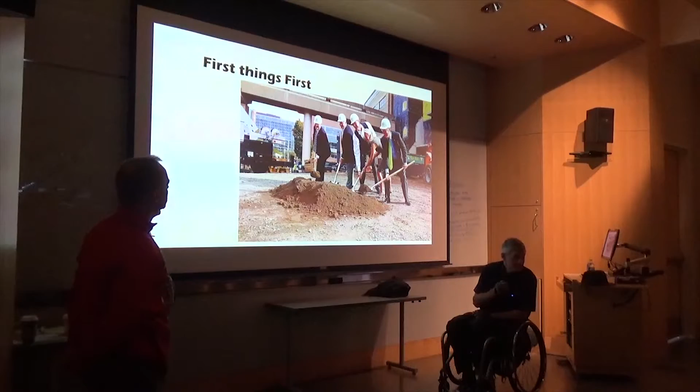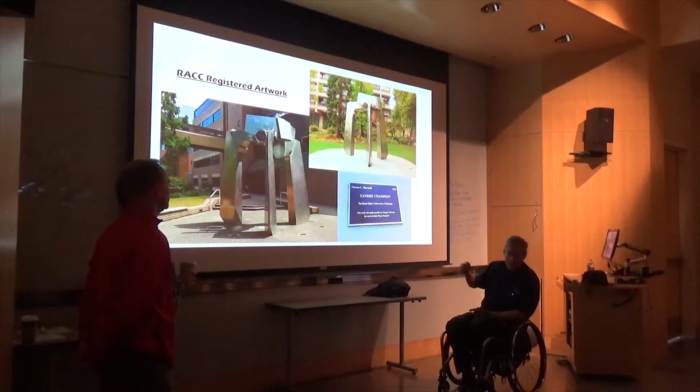Groundbreaking, but we had to do some things first. Remember that 1% for art? Whenever you have 1% for art, it becomes registered with the city. It can't go away. You have to do something. You can't just throw it out. So I got to design the footings for where we moved this to the other side of campus. That was kind of cool. But that had to happen first. In fact, the demo on this happened the day that Skanska started their demo on this.

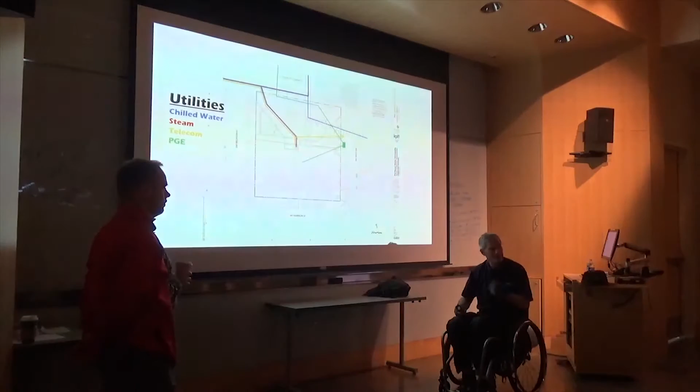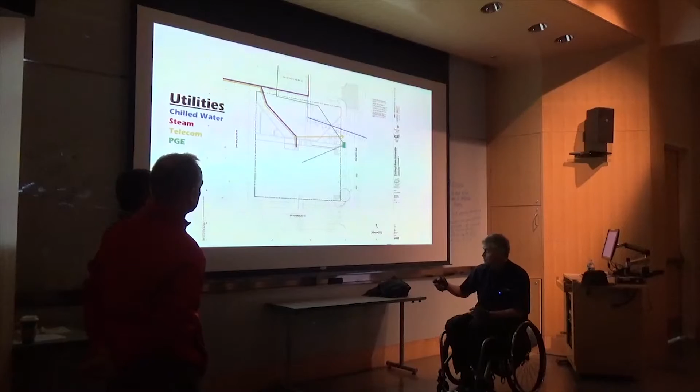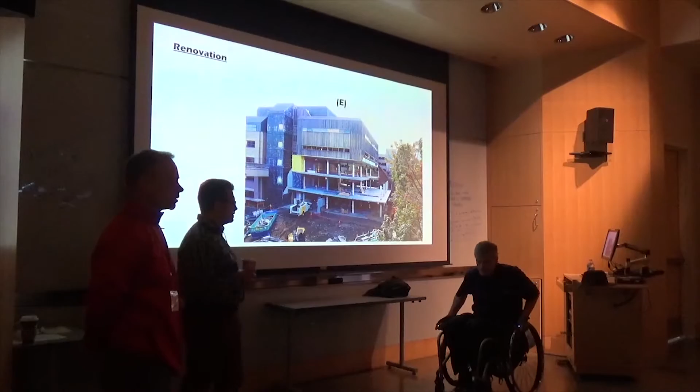The other thing that had to happen is we're centrally located on the campus. We've got utilities running across sky bridges, underground, power, chilled water coming across campus from others. You heard I was on a $17 million campus loop project. Well, that's chilled water coming into the ASRC over here, feeding this building, feeding my office building. All of this had to be rerouted as part of the construction process, but before we could start on the building and renovation. By the way, that took us 4 months just to clear that site with all those utilities. It was kind of a monumental undertaking.

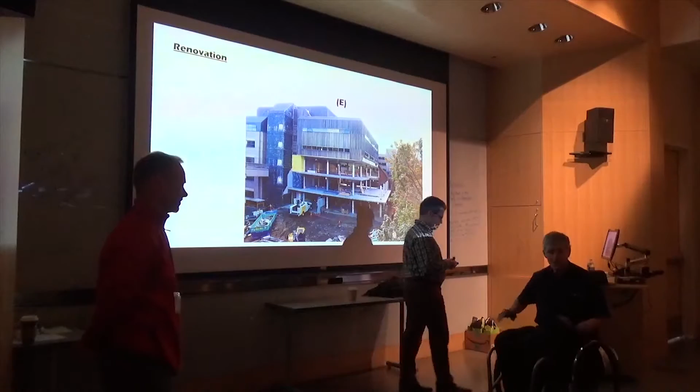In fact, before the project started, I told my boss, Mark Fuji, who's the project manager on this, I said, I don't want to be the design team on this because there's so much there. And he said, yeah, I'll figure it out. Well, it took us 4 to 6 months just to figure out how to get this stuff rerouted, because it's so integrated into the campus.

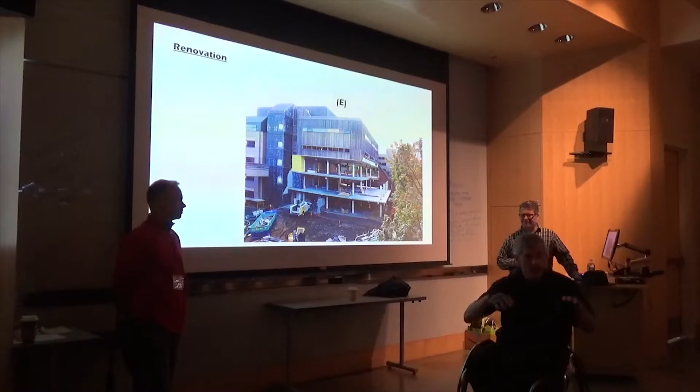So, on that note, this project, really every project, always starts with that RFP process, but in that RFP process, we don't really know what the scope is. Yes, we know it's going to be 42,000 square feet and they have some money to spend, but ultimately, we didn't know how much renovation was going to happen to the existing facility. We really didn't know how much reroute of those utilities that Charles just mentioned was going to need to happen, and we didn't have any idea about how big the atrium was going to be, or even the new addition, where it was going to be located, what it was going to be built out of.

So back in January of 2014, we sort of started with a rough idea about what we were going to need to do. And then we started meeting with SRG and Behnisch and exploring options, ideas. We knew that there was going to be a renovation, and I think the one piece that we knew most about the existing building was that we were going to reskin it, reclad the entire thing. But we didn't know what we were going to clad it out of. So we had lots of meetings up front to really discover what the building was.

So we needed original drawings, and this project is actually different than most that we work on with existing buildings, in that we had really great data for the original building. So yes, thank you, Charles. So we knew a lot about the buildings going in, and we could answer a bunch of questions up front. What was possible with that recladding? Where could we put additions onto the existing structure? Where could we put new openings? What was possible, right?

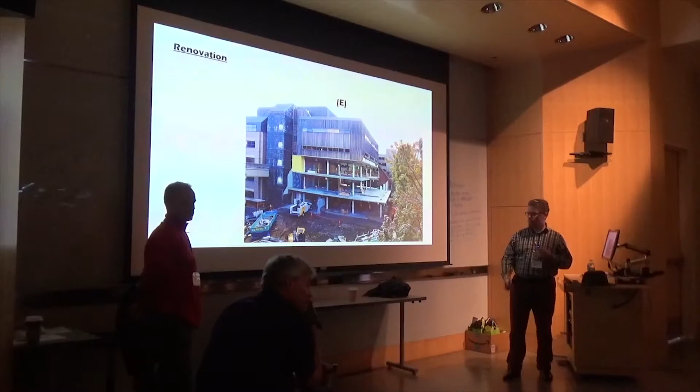that into consideration. David will talk a little bit about this in terms of the constructability piece, but there's lots of scanning and knowledge that needs to be gained about where those tendons are in that structure so that we can manipulate that structure. And I put a little E in parentheses on top there. You'll see that in your drawings in the future, and you'll use that in the drawings in the future. That means existing.

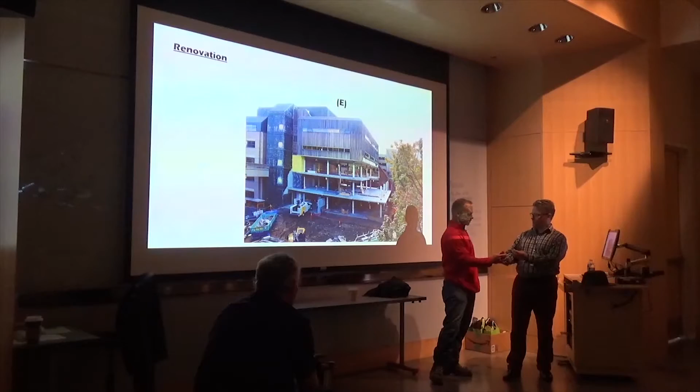Is that the microphone? This is the microphone. Okay. Were you done? I'm sorry. I am done. You can flip. I may jump in. So Jared and I are going to kind of tag team this. David and I have been working together for a long time, so we pretty much finish each other's sentences. Right. I was just going to say that too.

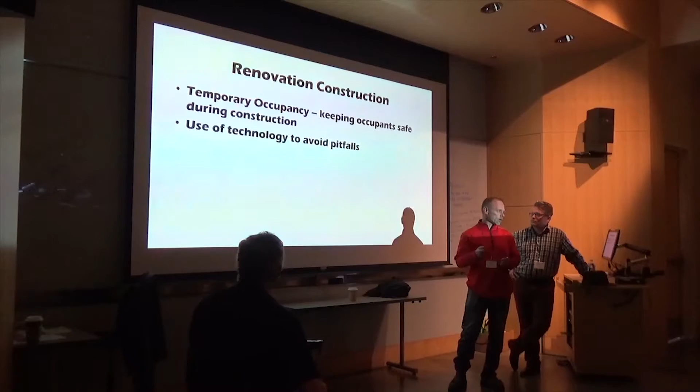So when we were talking about what we were going to talk about, we kind of thought, well, let's discuss 3 topics of what you might want to hear. So the renovation was one topic, the pavilion, and then the atrium. So right now we're just going to focus on the renovation. So the whole part he started to lead into this is half of this building here is occupied. So people are occupying the space adjacent to all this work going on.

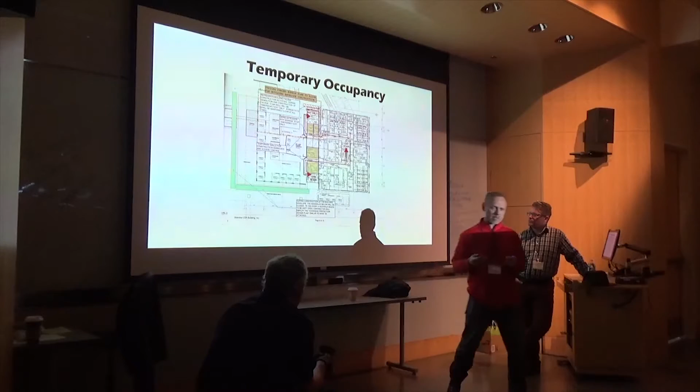So in order to pull that off, Skanska had to prepare and really plan for an occupancy concept. So this is kind of one piece of a very large document that says, hey, City of Portland, hey, PSU, here's how we plan on building your building while we're going to keep the space functioning. So we had to actually continue to move air, electricity's got to run through there, all the fire life safety systems have to continue to function. And that's actually probably a bigger feat than doing the construction itself.

All this logistics was, we have all these temporary walls, all the mechanical systems had to be separated to continue to move air and maintain all of the life safety systems. So that's a big undertaking. So as an engineer, I'm kind of thinking, well, what do you guys want to hear sitting in this audience, from a contractor standpoint? By show of hands, who has the ambition to be in construction? Anybody here? Construction?

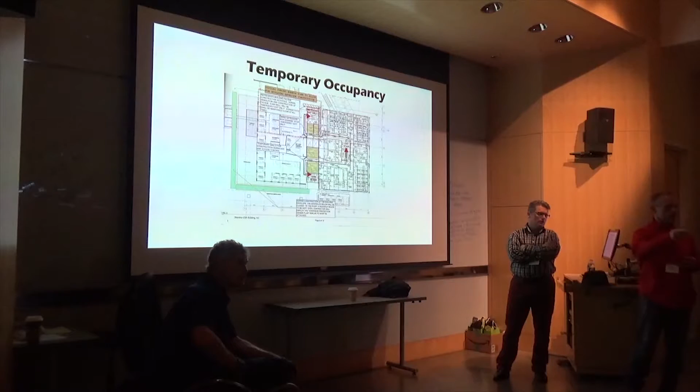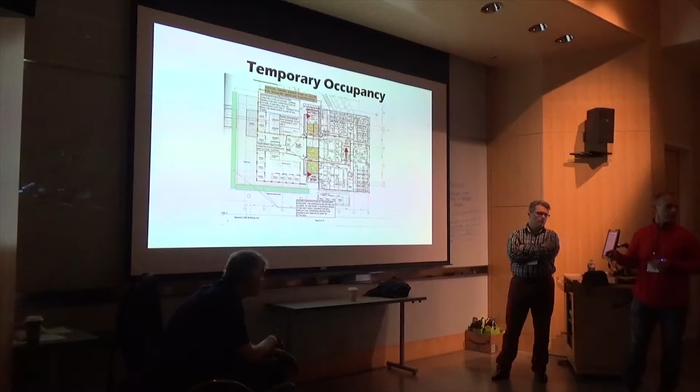Okay, so there's some folks here, we're speaking to some of you guys. We probably spent 3 or 4 months just figuring out how do we do this. So when you see those design documents, Jared says, hey, we got to do these openings, we got to add this steel, we got to add this concrete here. Well, that's probably part of the plan, but the bigger plan is how do you build around occupants? And more construction is this kind of construction.

Most of my career in 16 years has been working in occupied facilities or around people. So you have to have that mindset. How do we keep people safe? And you're always thinking about, like, if my child, this is Jared's daughter, but if she were mine, or whoever, right?

That person needs to be safe if they're just right over here and we're working over here. How do you make sure my daughter, my wife, my mother is going to be safe?

I think it's important to note that when you as an engineer produce a set of drawings and a design, the emphasis is that it's the final, that's what's going to be finally constructed the day that whatever you're designing opens up. But there's a significant gap that happens there. David has to figure out how to go from where it is the day he gets the project to finally completing those drawings.

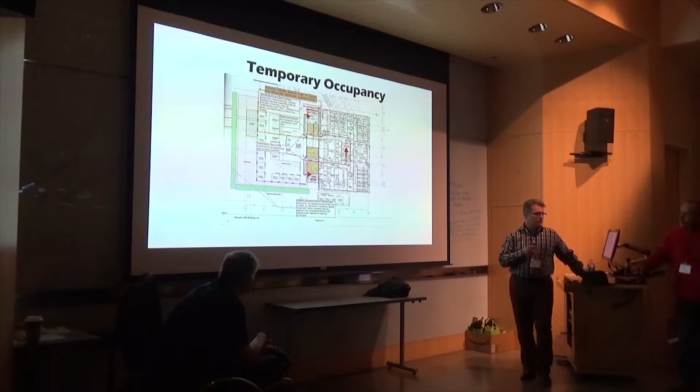And this is a major piece, both for David and PSU, but also the jurisdiction. Jurisdictions are now requiring this be developed and effectively permitted along with the drawings that we're preparing so that they understand how the occupants remain safe through the whole construction process.

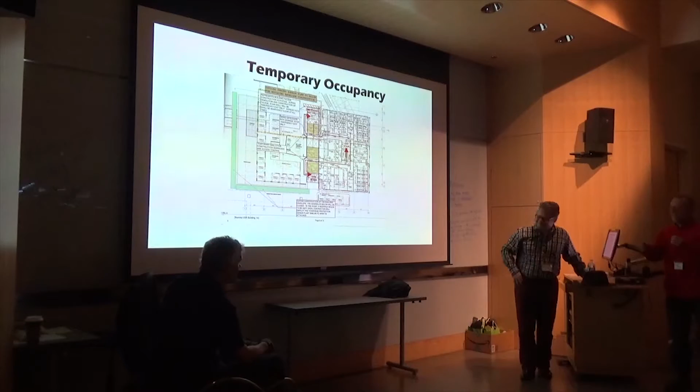I was going to say that. Okay. Good job. We definitely rehearsed. That's right.

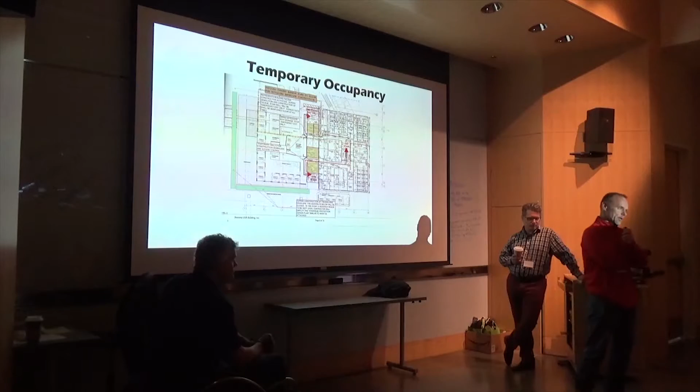Well, and safety is a big part of PSU too. We have our own safety officers that tour the site because ultimately we're sort of liable as the owner. So we also take heavy responsibility on safety. Yep. But too, as a good contractor, we want to take care of the client so we get more work, right? Yeah. Just as these guys do.

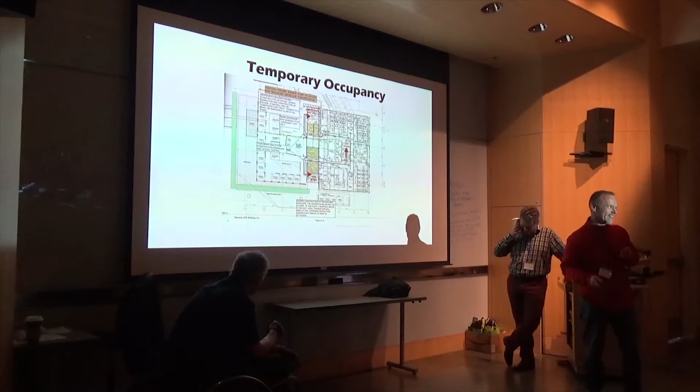Almost got that last job. Yeah, almost. 0.6 away. Anyway, different story. You guys won't understand that. We're going to have to go into it. Construction projects going on on campus right now.

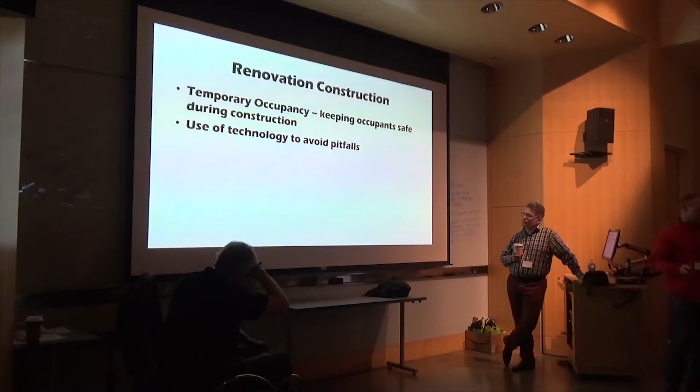Okay, so now we're going to move on to technology. I had this discussion of use of technology to avoid pitfalls. Jared talked a little bit about the pitfalls of a renovation. So here's some things that we do in order to look ahead: what kind of problems are we going to have and how can we avoid that? Well, number one, we have laser scanning equipment. You probably have seen this or heard of it, or maybe been part of it.

And when you're pushing something down, there's the domino effect, of course; there's other things too, like the top of this glass had to be adjusted. So that's a series of RFIs, a series of conversations. And each one of those impacts has a multitude of other ramifications.

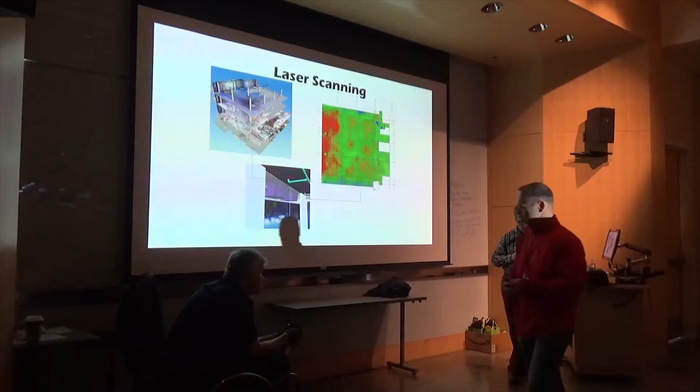So the whole floor fill piece, this is where we get involved, because adding floor fill to any slab is a great way to level out that slab, and obviously is needed in this scenario, but it also adds mass, weight to that slab that the slab was potentially not designed for. And so part of that RFI, request for information, coming from the contractor is, hey, we're going to add a bunch of floor fill. We think it's about 1 inch or 2.5 inches, as the case may be in some places.

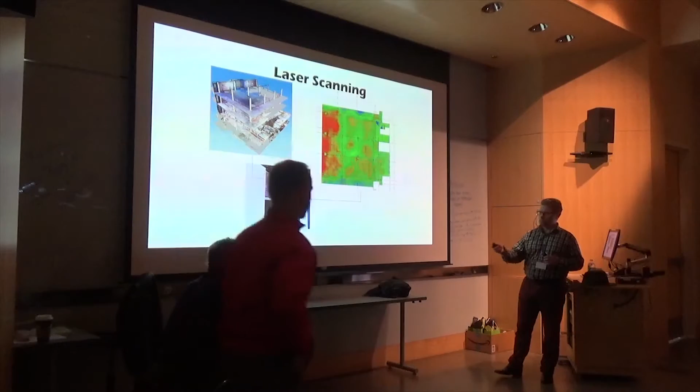Okay, so next slide. Oh, go ahead, that's yours. So this is the Pavilion Addition. Again, my first statement was we didn't really know what this project was. This is the final design concept, but during early concept design, we call it schematic design, which is kind of the initial design phase, we explored 13 different options for what this addition could be. And in those 13 different options, those were all just square footages, number of stories.

We also explored different material types. There was lots of exploration about using heavy timber construction. We went through a whole design process of looking at cross-laminated timber for the floor slabs instead of concrete. Ultimately, that didn't win out as the best solution for the project, and so the pavilion structure is 5 stories, also reinforced concrete construction, also post-tension concrete slabs. There's very little regular grid system in the building, and so all of the slabs are different thicknesses.

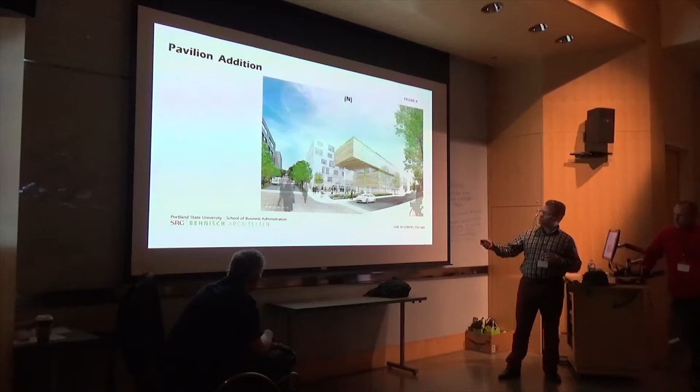You'll see on the tour, you can see it right now, this big cantilever overhang. These columns come up and they support just this 4th floor level. We then transition to columns that are out here on the facade that support a very large green roof assembly area, so everybody can go out there and have a picnic lunch when it's opened up. And we had to design this 4th floor slab to effectively transfer all of that load back into these columns. You'll see some photographs later in the presentation where this was a significant engineering effort. I mean, months of engineering effort to figure that part out.

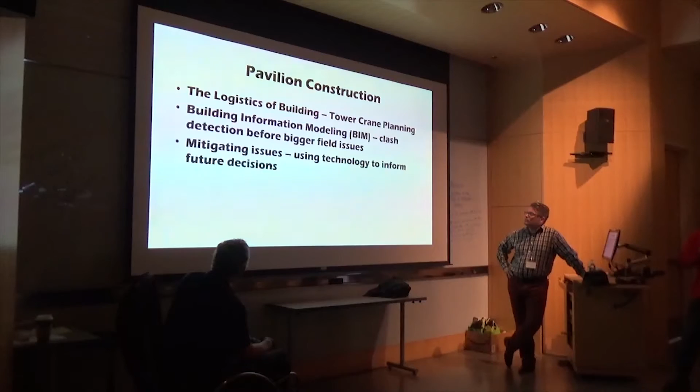Okay, so building the pavilion, a couple bullets I want to talk about. First, the logistics of it, tower cranes. You guys see tower cranes all the time in Portland. What does that mean? BIM, building information modeling, clash detection before the bigger issues. Let's do it all on paper, or actually now all in 3D, before we actually go do the work. And mitigating issues in advance, using technology to inform future decisions. So it's really cool technology.

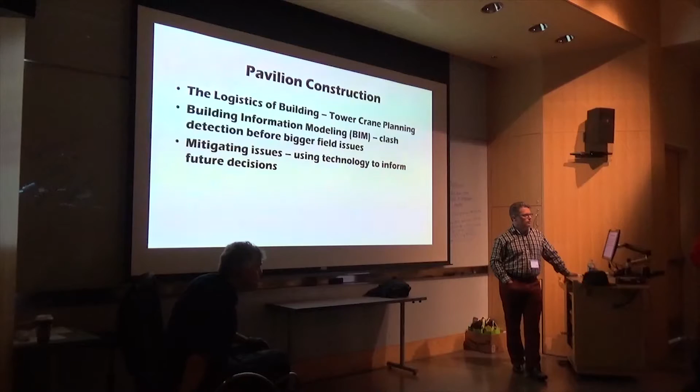And more, in the industry, our company now issued us a grant to spend a bunch of money to figure out how we employ 3D goggles, so we can walk people through spaces and figure things out, maybe even affect those systems in 3D, really cool stuff. So that's something Skanska is working on.

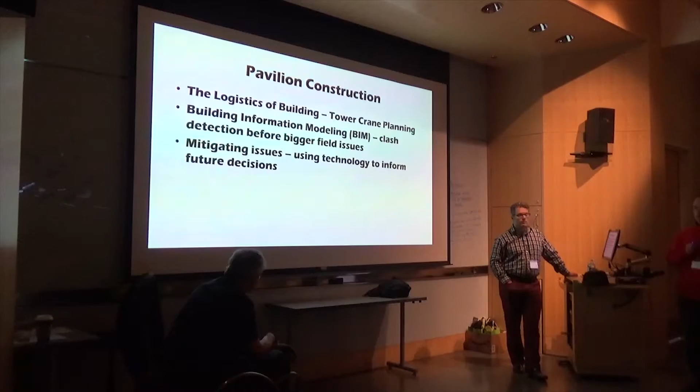I'm not sure how much the biggest rake beam we have weighs. Do you remember how much that weighs? The rake beam is really heavy. Enormous. But it is more than you can pick at 50 feet. 50,000 pounds, 70,000 pounds. Enormous. So really the tower crane is more for formwork, rebar, smaller things.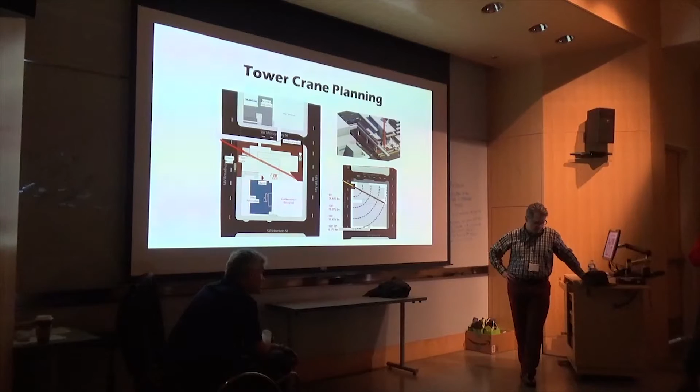All this planning we did around this. Matter of fact, there was a lot of discussion even with Jared. We hired Jared to help us figure out where to put the tower crane footing. The footing itself is 24 feet by 24 feet by 6 feet deep. So it's a huge mammoth, and it kind of sits underneath the street. So we had to dig that baby out of there.

And also, does it really effectively help us to do things on the other side? So we actually have to supplement some of our hoisting with other cranes because this itself doesn't do everything for us. By the way, how much do you think a 1 month operating cost for a tower crane is? Any guesses? 50, pretty good guess. It's about $30,000 to operate a crane a month.

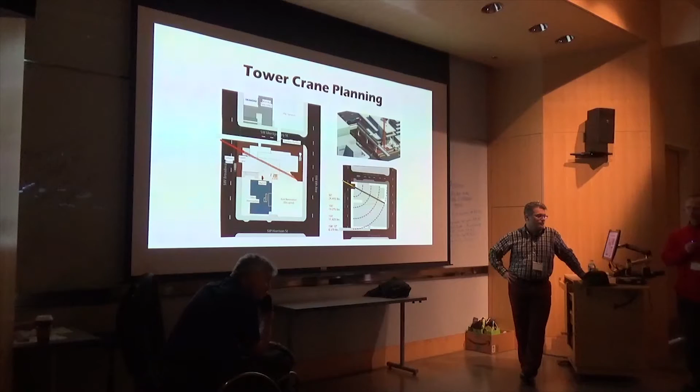So how much does a big, huge crane cost for one day? It could be $5,000 for a big crane for 1 day. So you start to do the cost analysis of it too, and how much the capacity. By the way, it's like $300,000, $400,000 to erect and dismantle the crane too. So before you even start working, you're spending, you know, $1 million.

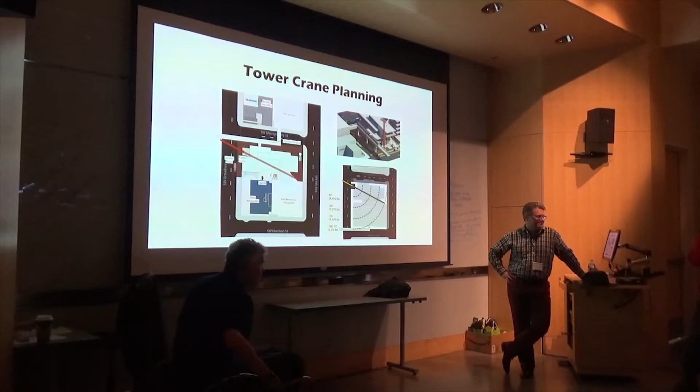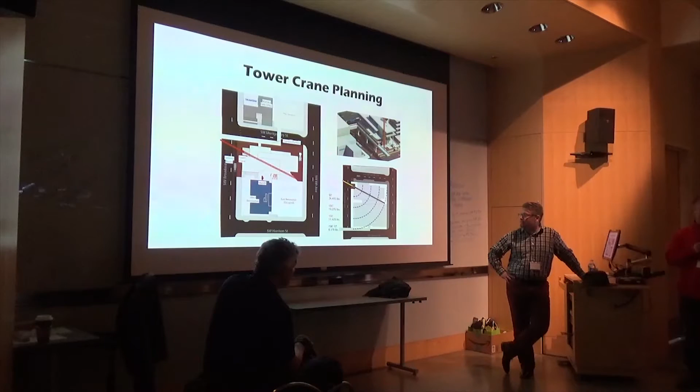And the footing is sacrificial. It stays there. So we had to actually bury that footing another 6 feet to allow other utilities to pass over the top of it. So you have to think about that. You have to know the design in order to plan where we can actually get away with putting this mammoth footing.

Okay, so now I'm going to move on to BIM. By the way, Jared, do you have anything to add to this? Or Charles, you guys have anything to add to this?

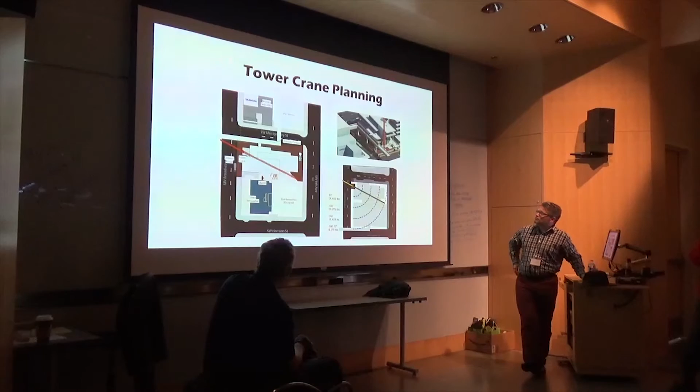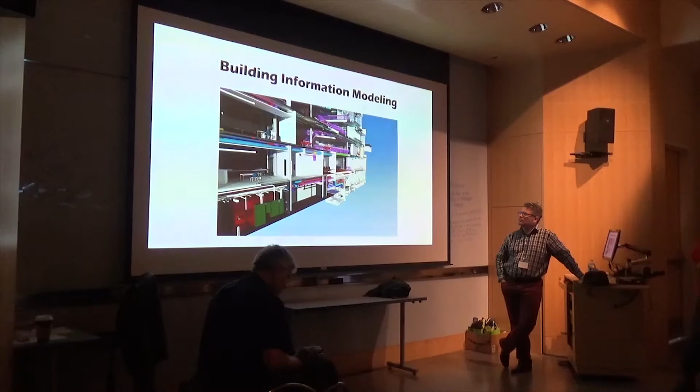Okay. So building information modeling, I'm sure you guys are very familiar with this. This is a cross section through the renovation, right down the middle of the building. You see this is the electrical gear. There's some mechanical systems that are coming from the exterior into the building. Everything that's colored is the stuff that we did as a contractor.

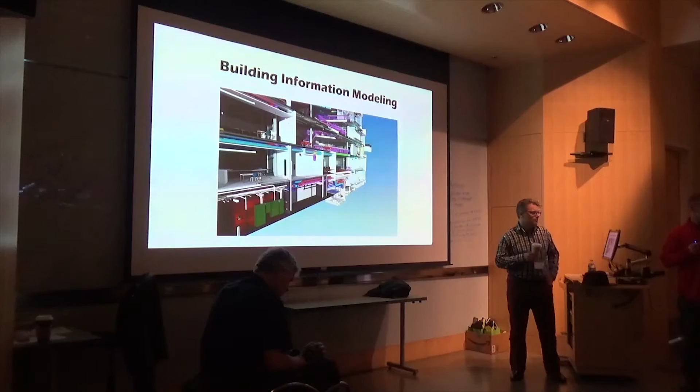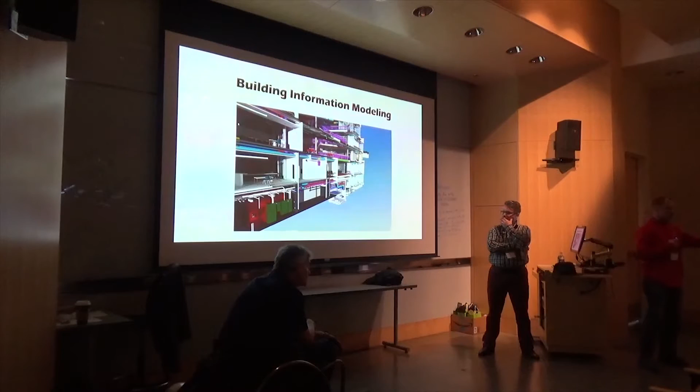So that's our responsibility. The design team says, hey, we need to do all this distribution and get all that in there, but now it's our turn to take all this over, and then we have BIM technicians, drafters, who do this, and they spend months. We spent 8 months probably getting this right, tons of time. But the payoff is that when you get out in the field, they can take those same drawings to their shop, fabricate those and deliver them on a truck, and it goes up like Legos.

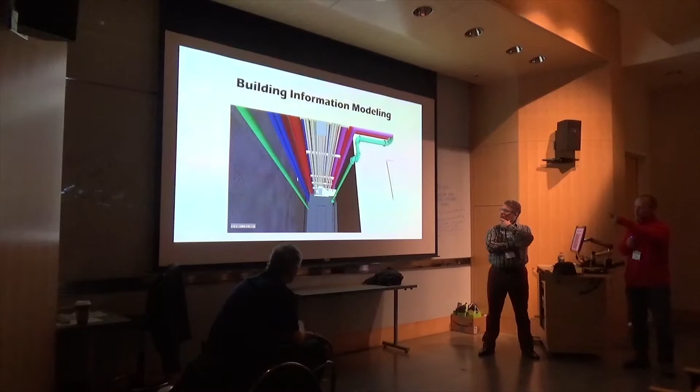That's pretty cool. Another picture of some of the modeling we do, and I'm sure a lot of you've already seen this. It's really a fun field to be in, and the architect can be in here moving things around, and all the collaboration that happens these days in the space is great.

Okay, so mitigating issues, moving on to a different topic. So this is a laser scan. Now we're essentially looking at the pavilion. This is kind of hard to see, but give me a minute here. This is the pavilion. Okay. Third floor. This is the renovation. You saw this part of the building over here. That's the half that was being demolished. Okay, so we're kind of standing on the bridge, looking down.

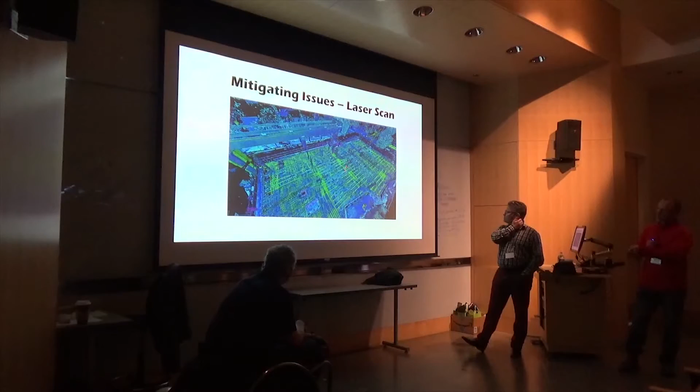So what you see here, these green lines are the cables, the PT cables. The bluer lines you can see are the reinforcing in the concrete. You see some of these stub ups for columns. You see some blank space here for, I'm sorry, I'm going backwards. That's the bridge.

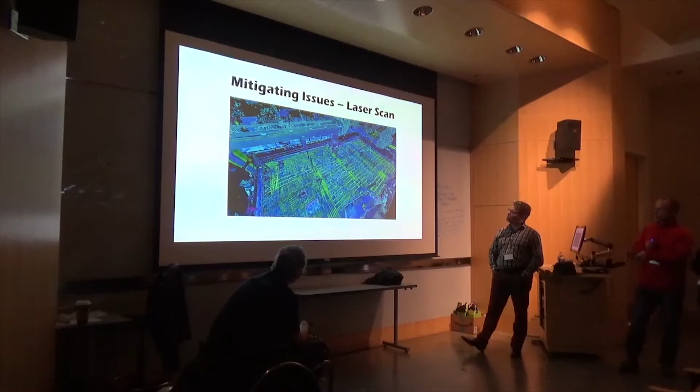The pavilion's over here. I got you all backwards. Sorry. We're standing on top of that renovation building. So this is the atrium right here. In any case, let's move on to this: this is a close-up of one of the decks.

So what we use this for, because sometimes we might have to go back and core drill, and if you core drill through PT, that is not good. So we have to know where all that stuff is, and that laser scan is like taking a picture of it. Now we can dimension off of this too. Oops. You can see some of the studs.

This is a steel plate across an opening. This is open space here. This is the deck. This is conduit here. That's buried in there. You got the cables, and you got blue lines that kind of represent the rebar. So I think this is a really important feature. This is fairly new, for the laser scanning to occur during construction.

And you have to realize that you get a bunch of stuff in the slab before you pour the concrete. You pour the concrete, and then there are anywhere from 10 to 15 subcontractors who come back and they need to hang a ceiling, or they need to hang a fire sprinkler line, or whatever, and they need to drill something into that slab. When you don't know where your reinforcing is, it's Russian roulette. It's really what it is.

And so this is extremely important, and I have to say that most of our higher ed and healthcare projects, we do not use post-tensioned construction. And we don't, because those are the facilities that get renovated and remodeled the most. I would imagine that Charles will call in 5 years and say, I need to do a renovation of this portion of whatever floor of the pavilion. What do I need to do?

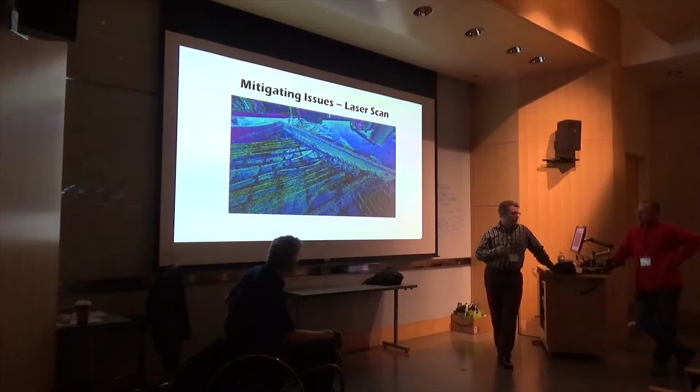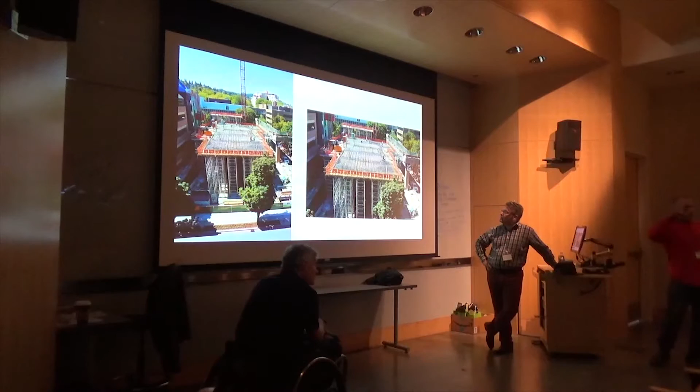Okay, so here's some pictures going through building the shoring decks that we're going to pour concrete on. So this is the huge cantilever that Jared was talking about. You can see all the steel. How thick is that? That's like 30 inches thick. 30 inches thick right there, because you can kind of make out this tier where you have an upper deck in the classroom, and then down you have another lower tier, so the classroom faces this way. Yep. So we're getting that ready to pour.

So if you look, you see the solid black lines going across. Those are your tendons. And both ways, Jared's got them coming across the column strips, and just from your PT classes, you'll notice that.

And so then we thought about, well, we could add thickness to the bottom of the slab, which is a much, much easier thing to do in terms of the construction, right? But then that was in conflict with the tops of the windows and their elevations. And so then we finally got to this solution, which was to utilize a built-in tiered classroom, and we're utilizing that increase in the elevation for the seating, like you're sitting on right now, as part of the structure.

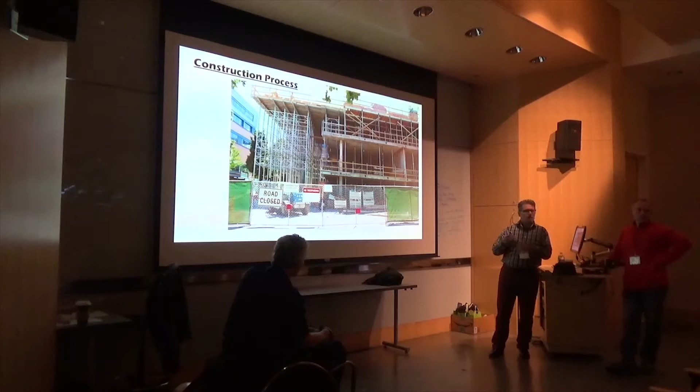We design our structures for capacity to begin with, but ultimately it's deflection due to gravity. Gravity's happening 100% of the time. Deflections are the things that lead to the biggest challenges for a building owner, and we're dealing with that. Again, back to the renovation, we're dealing with that right now.

Those original slabs deflected a lot out at the tips. We had to pour a leveling compound on the slabs just because of their deflection. We're doing something different here so that we can control that deflection long term on these slabs, and we don't have to do leveling compound, which is good.

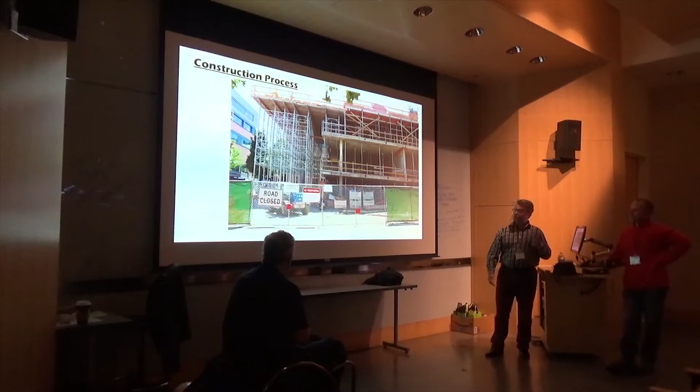More construction photos. This is this one. Yep, there you can see it. I have the clicker. So these lines that Charles was saying, this is actually our distributed direction of tendons. So for those who've taken post-tension design, generally speaking, we run our tendons in a distributed direction and in a banded direction. It's kind of like joists and then a beam, or a girder, if you will. And here's our banded direction here.

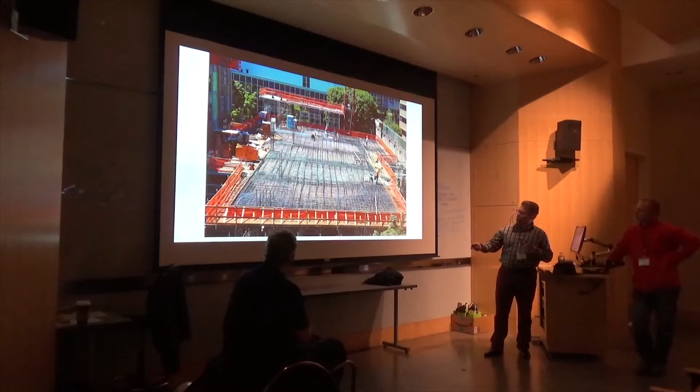Honestly, in this slab, we could have gone either direction. It made more sense for us to try to keep this big cantilevered edge of the slab up in the air by utilizing an equivalent series of tendons running along there to really lift that slab up. And you can see the significant amount of reinforcing that we have here. This is why having a CMGC is really, really helpful on a project that is this complex.

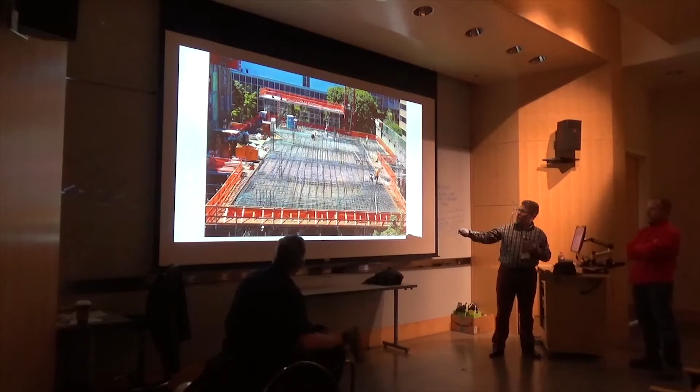We understood at some point, after we redesigned this for the third or fourth time, that this was going to be poured in two distinct pours. Working with their superintendent of concrete construction, they're going to pour this lower deck first all the way through, and they will have a whole bunch of reinforcing stubbed out and sitting there ready for a secondary pour. This elevated portion was a secondary pour for them.

We needed to add enough reinforcing between the two pours so that they could stress the tendons between those two pours and not pop that top secondary pour off. That would have been catastrophic. We'd all be singing the blues.

So something else too about the construction methodology of getting concrete up here, because you think, oh, we'll just get some concrete trucks and pour it. Well, there's a lot of considerations on the slump and getting concrete to flow through. Sometimes you have a lot of rebar and you can't get it to flow and you can't get it to consolidate. So we're asking Jared for maybe some design change or admixtures in order to get the concrete a little bit more flowable. We have those vibrators that allow it to consolidate. But there's a lot also in the concrete design mix, as I'm sure you guys are aware.

Then on my end of it, I've got my special inspector out there, Carlson Testing. They're pouring concrete, and my special inspector is grabbing cylinders to test later. And then I get, and Skanska gets, the 7-day and 28-day average compressive strengths on the concrete that goes in here. Jared's often calling for 6,000 PSI concrete, and I'm getting numbers back like 8,000 and 9,000 PSI concrete. That's better than 6,000.

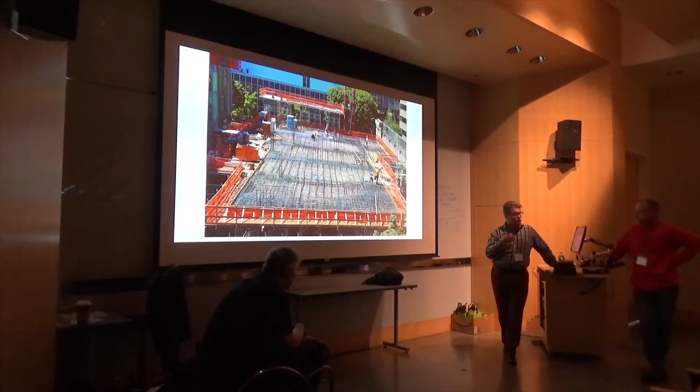In this case, we took additional cylinders on site and made sure that Carlson was testing the modulus for the concrete, not just the strength, because we did not want that high bay shoring to be pulled out too early, which would induce a deflection in the slab if the modulus hadn't gotten to the design capacity. In concrete construction, concrete creeps over time, and so a small amount of initial deflection can lead to a very large amount of deflection in the future.

We wanted to control that small amount of deflection up front, and we needed to do so with added cylinders. I think they took 40 cylinders between this slab and the 5th floor to understand that modulus.

Okay, so we're going to move on here. Oh, yeah, me. The atrium. Awesome.

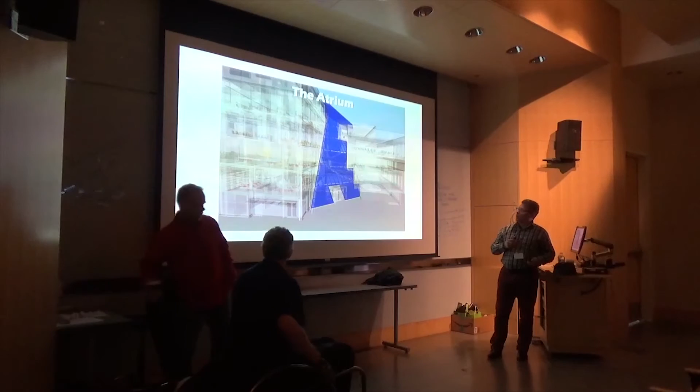Well, this is the last piece of the project that's basically under construction right now. It's effectively a 90-foot tall skylight, is really what it is. Now, we're in charge of the structure that supports that skylight, but the skylight itself is what we call a delegated or deferred design to a subcontractor who has expertise, basically going to build the skylight.

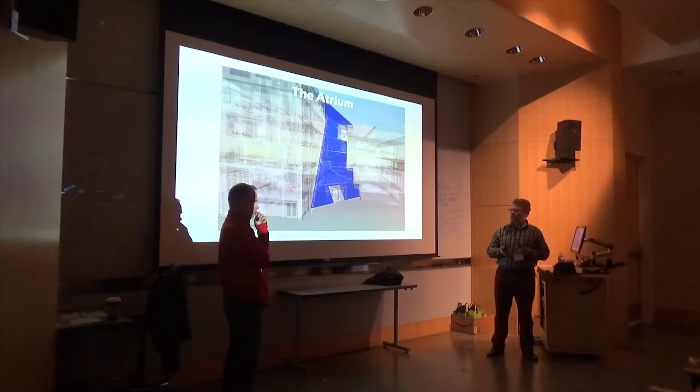And so early on, the subcontractor was selected. We had lots of meetings about how to make this work. You can see that it's both sloped and angled, so nothing makes sense ever at all. And in order to make this work and preserve a separation between the new building here and the existing building here for seismic purposes. We don't want the two buildings to talk to each other during an earthquake.

We have a very large rake beam that runs the entire length of this skylight atrium, supported at the foundation here, and then at that concrete shear wall core up here. And it literally sits on a slide bearing, so that when this building shakes at a certain period and this building shakes at a divergent period, they don't pound into one another and they just slide along.

The atrium is not heavy. That's the good news. We don't have a lot of mass we have to hold up in the air. We just have a very, very long distance to span a very big steel member. So this is effectively a customized steel bridge girder, for lack of a better term.

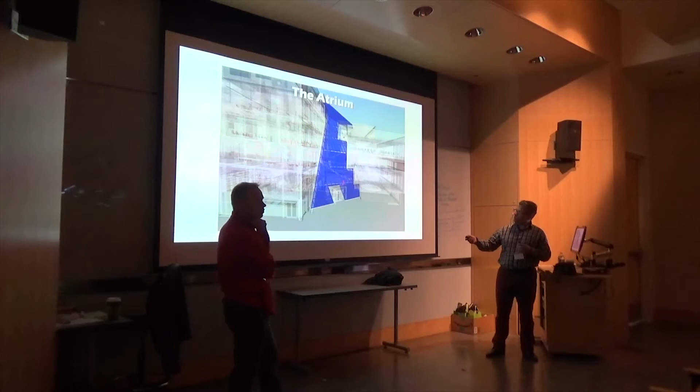And in between, at each of these floor levels, we are supporting that glazing. We're providing an opportunity for the skylight to sit and support there. So we're taking this from the pavilion in a series of very large tube steels back to this big rake beam here.

Anything to add? Nope. Okay, so the

Atrium construction, there's a couple points here. This is probably the most complex for us. Matter of fact, we think this probably has the most risk for us to get the job done on time. So we've spent the last several months, like Jared said, getting this right, working between DMR, our skylight subcontractor, and Buffalo Welding, our steel subcontractor, and of course, Jared and our design team working a lot of hours to figure this out.

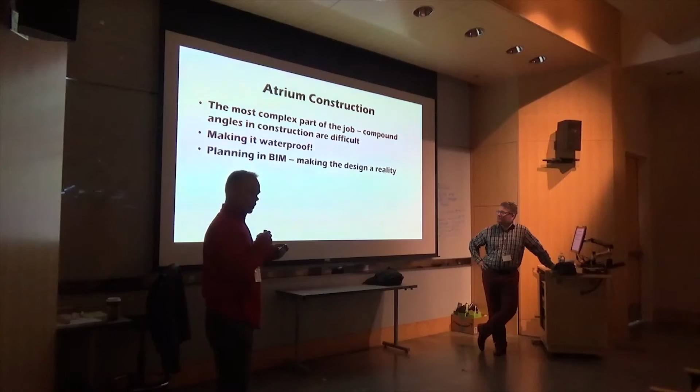Also making it waterproof. Of course, everything that Jared just said, we also have to make it waterproof. So, anybody figure that out? You have a job afterward, just come see me.

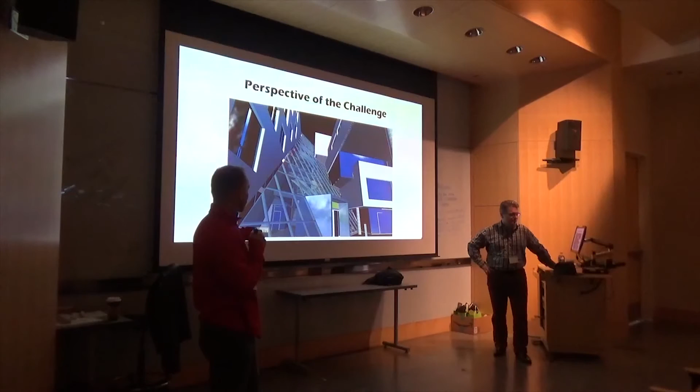Planning in BIM, again, this is all done in 3D. So just another perspective of this atrium. We'll go out and take it for those who are going to be there today on the job walk. I'll go kind of show you what this is beginning to look like. You can see that the materials that we have to interface with is, number one, we have the renovation, which is a metal panel structure. You've probably seen the new building and what that looks like. So we have also a seismic joint that we have to build and make sure that's sealed.

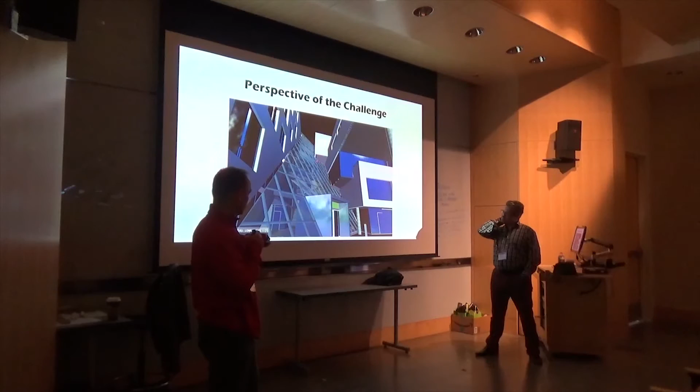On this side, we have a curtain wall or a glazing with then a wood soffit, then up against wood again. And then this is another wood soffit, then glass, wood, and then there's the roof up here with more sheet metal. Here's kind of a see-through of all of the elements that we have to bring all together. Can you go back? Yep.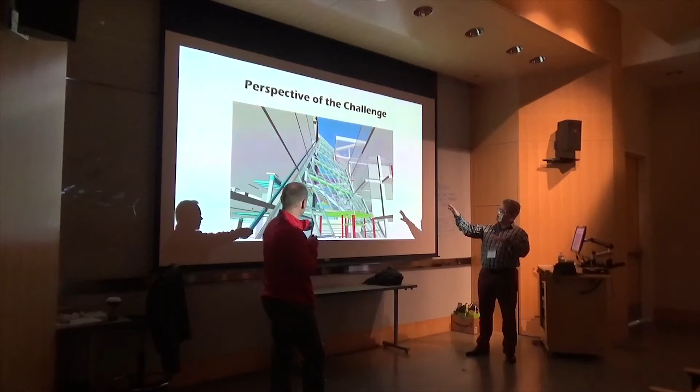So one thing I didn't mention is that there's also a bunch of stairs and bridges interconnecting the existing building and the pavilion. And those stairs and bridges are all anchored to the pavilion, so that's their home base, if you will, and they all sit on a series of steel members, a carriage of steel members on the existing building with, again, a bunch of slide bearings. So fairly complex. We need everything to slide nicely.

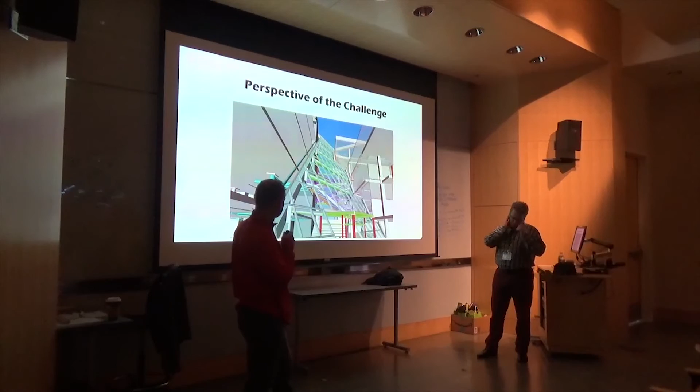We need it all to sit there and not deflect. You can see the large steel members that we're throwing in there to make sure that we can keep that bridge from being too bouncy as you go between floors. Yeah, this is all the added steel he's talking about here. We also, as an engineer, you have to pay attention to things like, hey, if it is too bouncy and you're 60 feet up above the base condition here and you're walking across a bridge, nobody's really going to want to walk across that bridge.

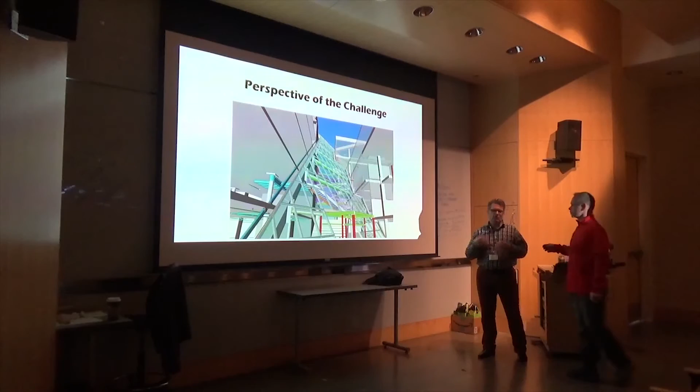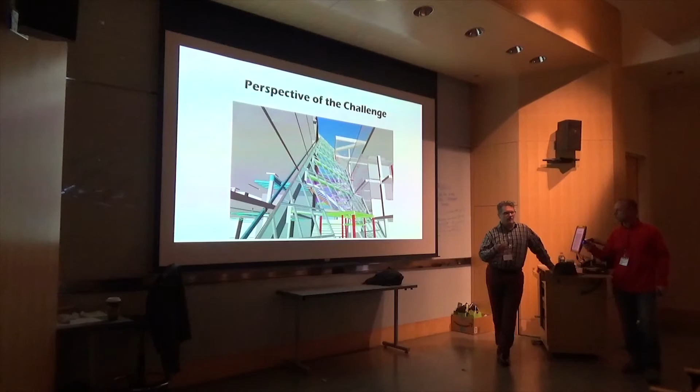So those are the things we have to really think about. Okay, it's not just about making the material work for capacity. It has to be comfortable and give people the confidence to actually utilize that pathway between the buildings. So here's some of the construction.

You can begin to see, on the pavilion side, the steel members here and here. We'll go out and look at this. This is the other side where there's a vertical curtain wall here. Again, the point here in these next few slides is we have two subcontractors that basically have to come together and get their work to be within a 1/16 of an inch. I mean, literally, we're building a piano to get all this to work right.

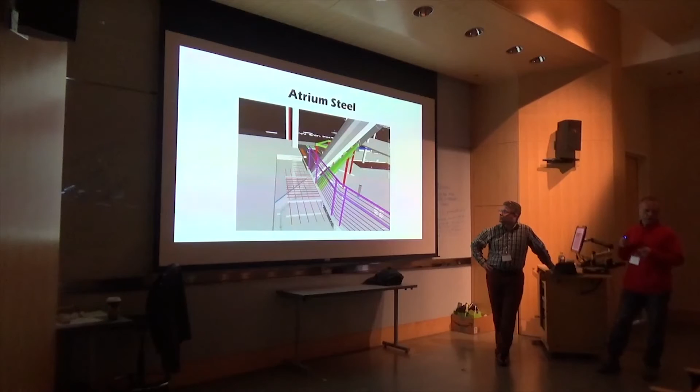Everything has got to line up exactly because they're building all this in the shop and then bringing it to the site. So it has to be dialed in. Again, all these interfaces between the two subcontractors, like this beam here. All these systems are fabricated elsewhere. The steel, obviously all fabricated, has got to come in here and sit exactly and marry up with all of our concrete embeds.

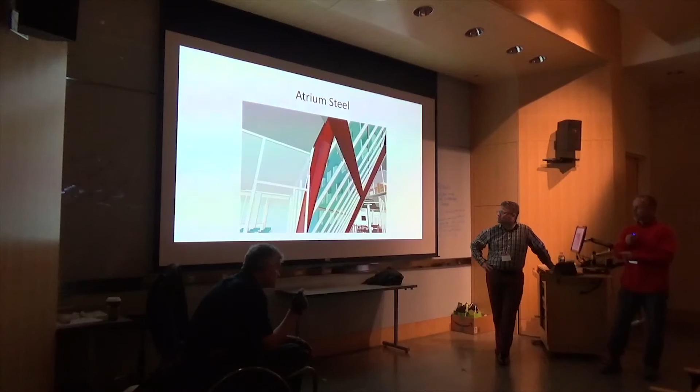So that's why these models, I don't know how they did it before BIM. I have no idea how you do all this on paper. That's just crazy. I don't get it. Oh, yeah, right. There's construction tolerances, but not on this job. We're demanded a higher level of tolerances.

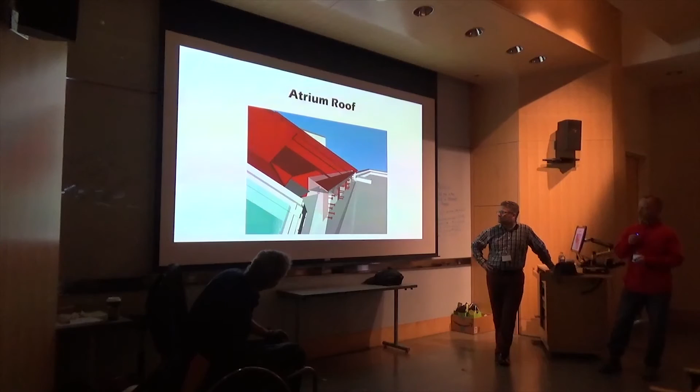This is a concrete wall in gray that's translucent here. So I wanted to show you the embeds here that have to marry up with these beams to carry the roof, and also this plate on top. These are embedded elements that all have to marry up exactly because these all have compound angles, and because this designer doesn't want to do anything straight. They like curves, they like angles, and that's just how they do their designs.

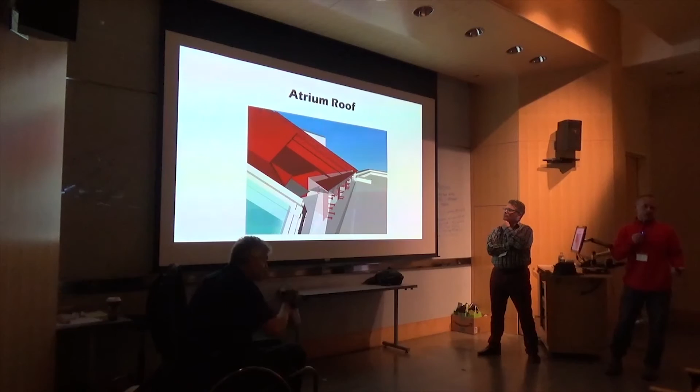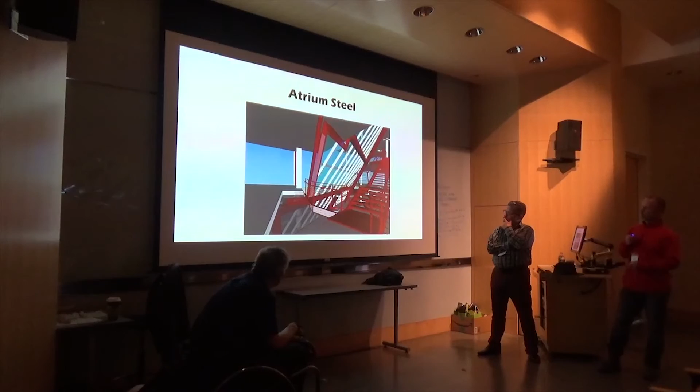Again, a lot more interfaces between all these elements. Here's one of the stairs between the renovation and the new pavilion. And that's it, because I wanted to try to get done here at 2:45. So anything else you want to add, or do we open up for questions?

The only thing that I would add is that when I was going to college, you think, oh, I am doing my calculations perfectly. I'm carrying 14 significant figures. I am like the best engineer out there, which is great. But what you realize is that it doesn't really matter how good you are as an engineer if you can't integrate yourself with the entire project team, which takes communication, patience, and a whole lot of ability to see other people's perspective, so that it's not just about the best engineering approach, it's about the best project approach.

Amen. That is how you do that. You don't build complex jobs with everybody working in silos. There's certain people we like to work with, Jared being one of them, because we know we can work together to figure out a collaborative solution. So we have a really good team. All these guys are strong trade partners, strong design team members, great client to work with. So, do you guys have any questions? We have, I guess, a few minutes.

Hey, I'm curious, you were talking about how you would use the laser scanner on those post-tension floors. What did you do before you had that technology? Hope? Yes, and hope. What typically happens is when I get construction projects in other buildings on campus, and the contractor wants to drill through somewhere, I'm going to say, not until you give me your scan report. I will X-ray it, ground penetrating radar kind of thing. But yeah, won't let them. Contractors can't drill without giving me a note that they know there's nothing there.